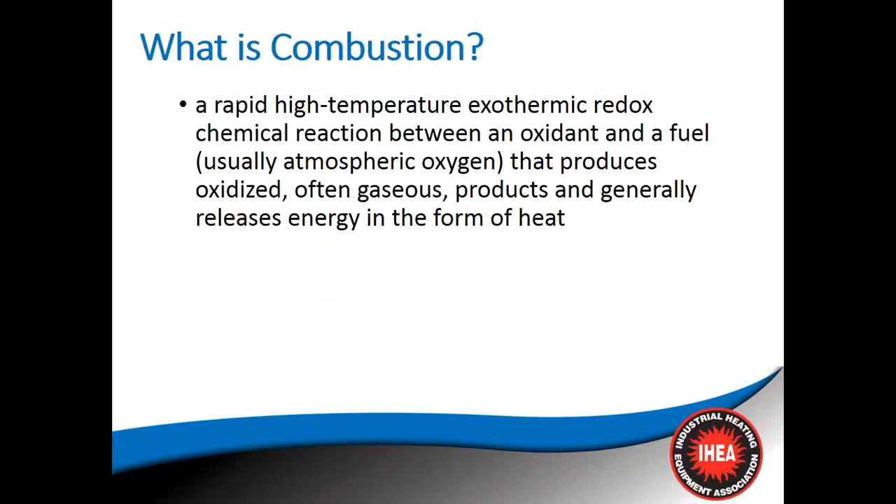In case you're having a little trouble remembering all of those words, or chemistry happened too long ago in high school, another way to think about it is fire.

Why study combustion? Well, there are three main reasons that I like to study combustion. One, it is useful. Two, it requires caution when using. And perhaps most importantly, it is fun.

There are many, many uses for combustion. The three I like to call it the three I's of combustion: increase temperature, incinerate, or illuminate. Throughout history, there have been countless processes that use combustion to do one or more of these three things: heat up, burn up, or light up.

Many, some counts would say most, processes in the industrially advanced world use combustion in some way or another. And in fact, combustion was one of the key elements that started the Industrial Revolution, when they figured out how to use the internal combustion engine.

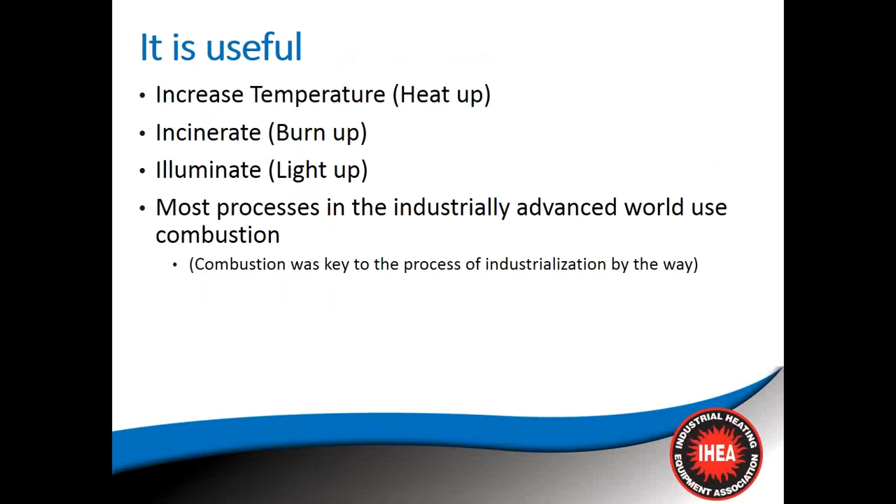It does require caution. I'm sure that many of you have seen this photo or others like it. On May 3rd, 1937, a blimp called the Hindenburg left Frankfurt, Germany with 97 people aboard. 3 days later, after an uneventful trip across the Atlantic Ocean, they were docking near Lakehurst, New Jersey, and the details are a little sketchy, but the result is apparent.

Right here, we have what we would consider uncontrolled combustion. 36 people died out of the 97 aboard. And what happened is they filled this blimp with hydrogen, which is lighter than air. We'll see later why hydrogen would have been a bad choice for that. But we have uncontrolled combustion.

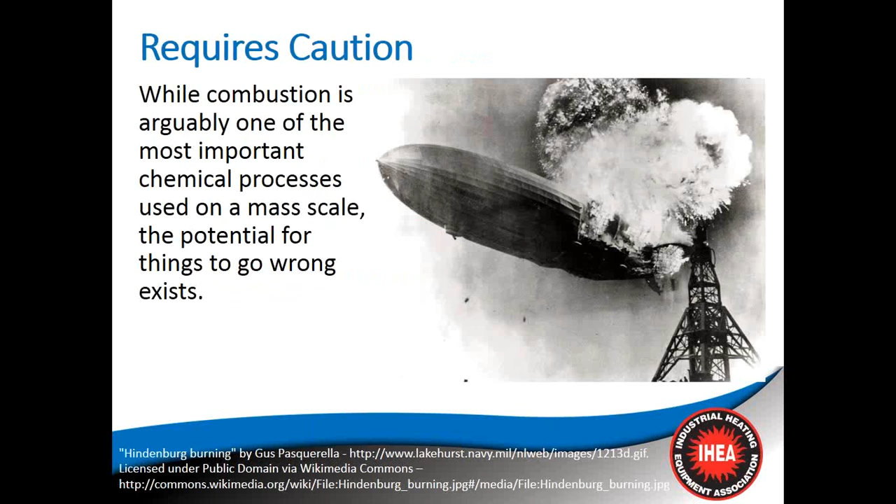Accidents can happen. We need to be careful. We need to respect combustion. We don't need to be scared of it, but we need to be respectful of it.

And it is fun. I was a little boy once, and as most little boys, I liked to see fire. I thought it was cool, and I never thought that in my professional life I would be able to do combustion, and that's what has kept me interested for the last 10 years or so. Hopefully I can infect you a little bit with my enthusiasm and show you that combustion is fun.

Before we get too much farther, I want to make sure that we have a common set of definitions so that we understand some of the terms that we're going to use.

A British thermal unit, also known as a BTU, is the amount of heat required to raise the temperature of 1 pound of water by 1 degree Fahrenheit. The calorie is the amount of heat required to raise the temperature of 1 kilogram of water by 1 degree Celsius. So these are units of heat or energy that we will use.

Particularly in this talk, I'll be using the British thermal unit, but you may run across the calorie or some other similar unit. The specific heat is the amount of heat required to raise a temperature of 1 pound of a substance 1 degree Fahrenheit, or 1 kilogram of a substance 1 degree Celsius.

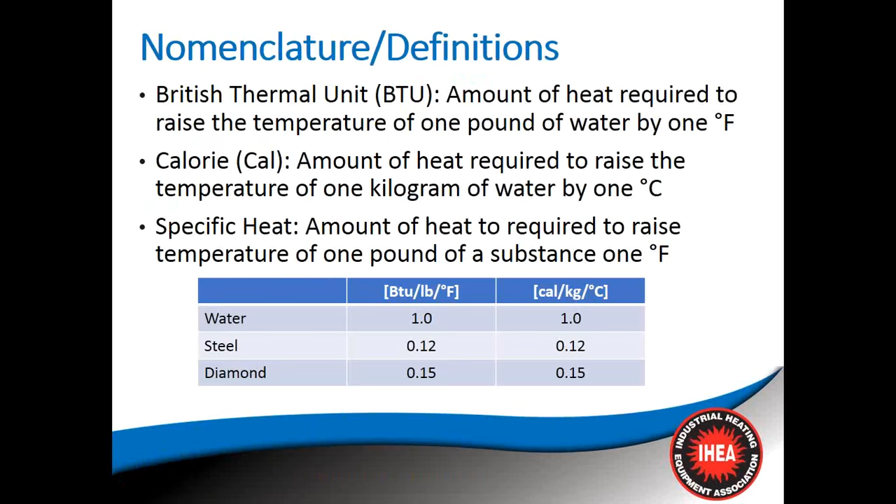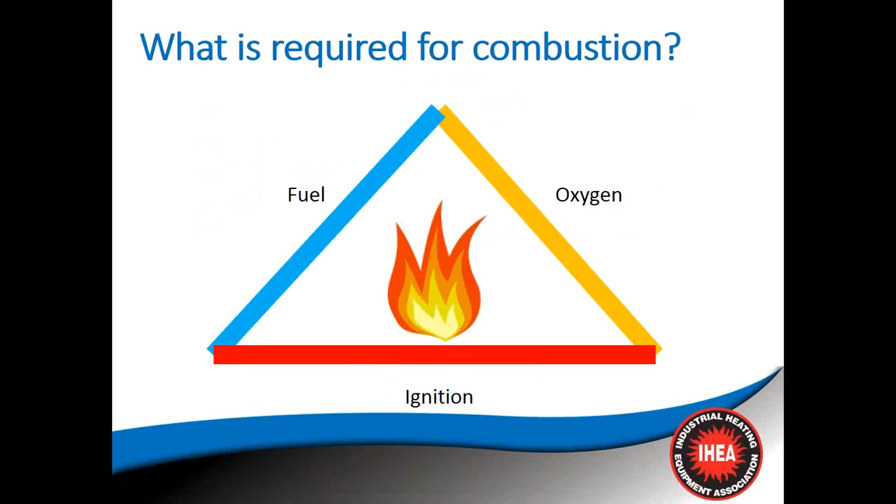What is required for combustion? There are 3 things that conveniently form a triangle: fuel, oxygen, and some source of ignition. Get those together and you can have combustion.

For fuels, most often we'll see those as a hydrocarbon, which is a substance that's made of hydrogen atoms and carbon atoms that join together into molecules that will combust later.

Many times, and particularly in industrial applications, but also in residential applications, your furnace, which if the weather has been anything like it is in Pittsburgh where I live, you have been using your furnace quite a bit over the last few days.

But the fuel there is often in a gaseous form, such as methane or propane, or there can be process gases such as coke oven gas or blast furnace gas. Many different forms of fuel. All of those that I've just mentioned have one thing in common: they're made of hydrogens and carbons mixed in various specific combinations.

There are other forms, such as a liquid, say an oil or gasoline for your automobile, and solids such as wood or coal. The important thing is, though, that in order for these substances in either liquid or solid form to combust, they actually have to become gaseous in some form. So when your coal is burning, not to get into too many details, but the hydrocarbons form a small gas as they heat up, and then they combust.

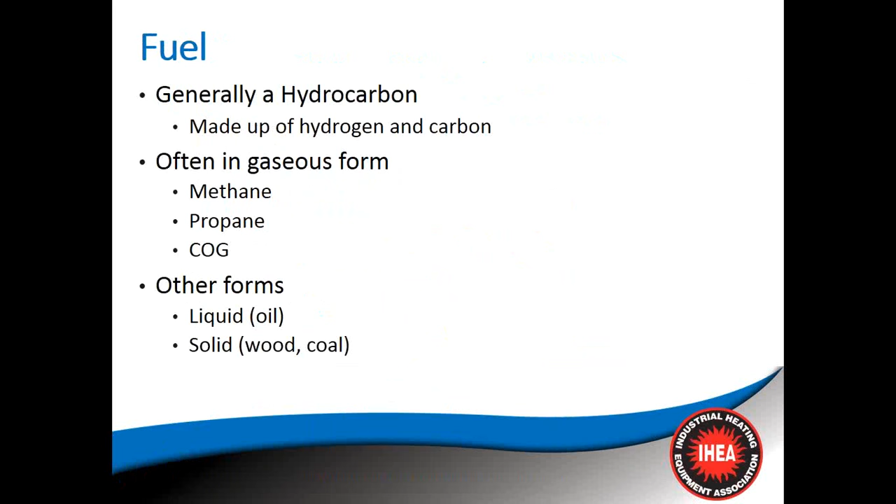Oh, I meant to mention that just like with the Hindenburg we saw, that source of fuel is not technically a hydrocarbon. It was pure hydrogen. So not all fuels are hydrocarbons, but the vast majority of fuels used commercially or industrially are going to be a hydrocarbon.

Oxygen, which is the second leg of the combustion triangle, is available in atmospheric air. Look around you in your room there. Look around and look at the air. I'll give you a second to do that. If you had superpower vision, you would see that approximately 21% of that air is oxygen and about 79% is nitrogen.

Atmospheric air is readily available. However, if you're going to use it to propel a combustion system, then you'll need a fan or a blower. There are some systems where you can use a pressure difference to drive that combustion, but generally it's going to be a fan, a blower, or something like that.

It is also possible to use pure oxygen. The problem is that is not readily available. It has to be purified, separated out from the nitrogen, and that is a utility expense. That can be piped in or crated in or something like that, bottles of oxygen. It is more efficient, but it is also an ongoing expense, whereas air is readily available, and there is an expense associated with the fan or the blower, the electrical cost of that, but the air itself does not require any utility expense.

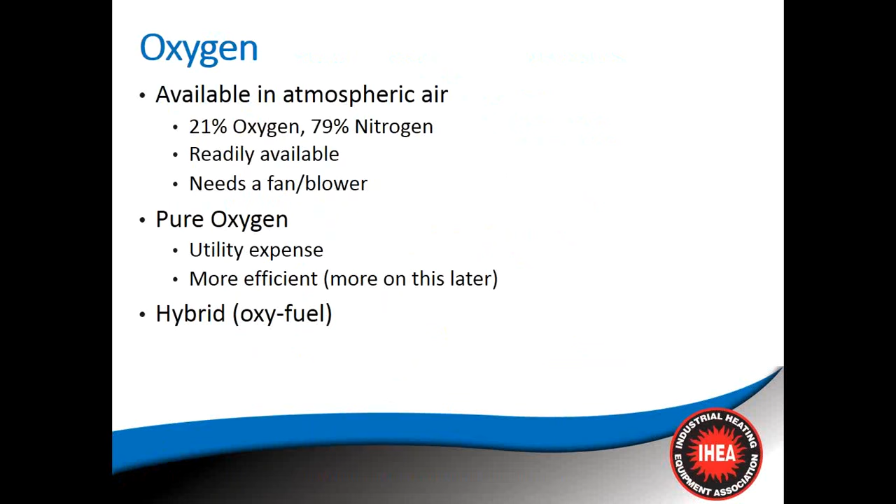The source of ignition, which is the third leg on the triangle, there are several different types. Say a direct spark ignition, such as your spark plugs in your automobile. You could have a small pilot, like I have on my water heater at home, or you could simply use the temperature in the chamber. If you have a process, say a reheat furnace or something like that, where the temperature might get very high, anything above 1400 or 1600, then often you can introduce the air and the gas into that chamber, and it'll be hot enough that it will ignite and combust on its own.

There are subsets of these. For example, I was thinking about it when you watch the survival shows and you rub two sticks together. That is a very difficult way to do it, but what you're doing is you're raising the temperature of those two sticks. You're getting enough heat there that you can actually combust the materials. So that would be an example of a temperature ignition. And if you have flint and steel, that's obviously a direct spark ignition.

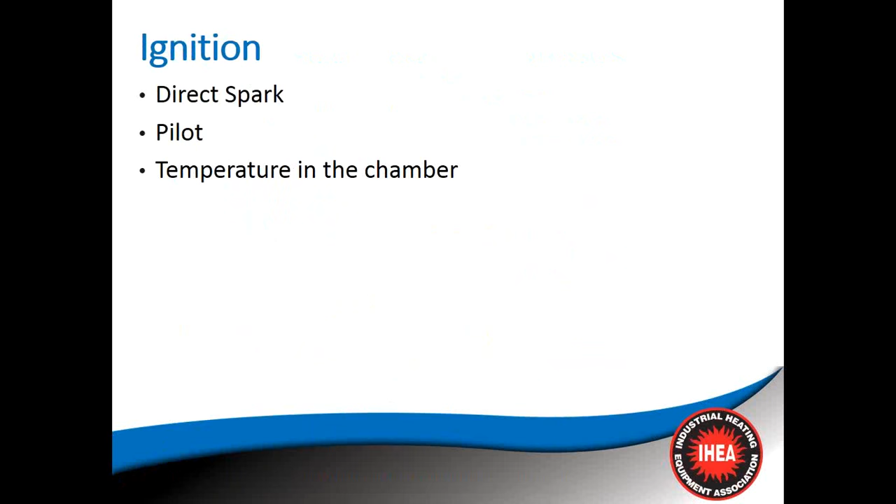So we need to keep them in a certain range of fuel and oxygen amounts, and I will go at great length over the next few minutes to discuss what those ranges are and how we calculate what those proportions are.

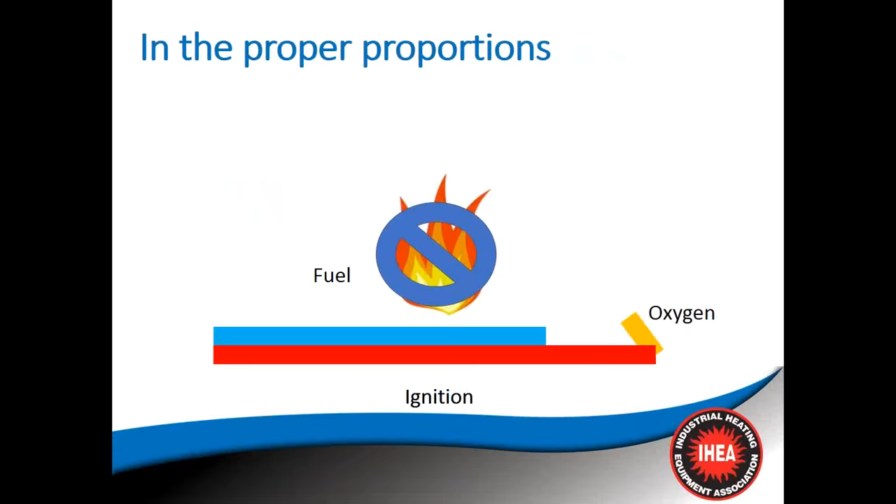The proper proportion is known as the stoichiometric ratio, which means the proper amount of oxygen or air required to combust the fuel completely, with no oxygen and no fuel remaining after the reaction.

So at your next cocktail party, you can impress your friends and colleagues by knowing this hundred dollar word here, stoichiometric ratio. Or maybe you need to go to different cocktail parties if this is the kind of topic that comes up. But in any case, what this means is that you have the right amount. It's like the middle school dance. You want to make sure that everyone is able to pair off and no one's lingering around the periphery, unable to enjoy, unable to take part.

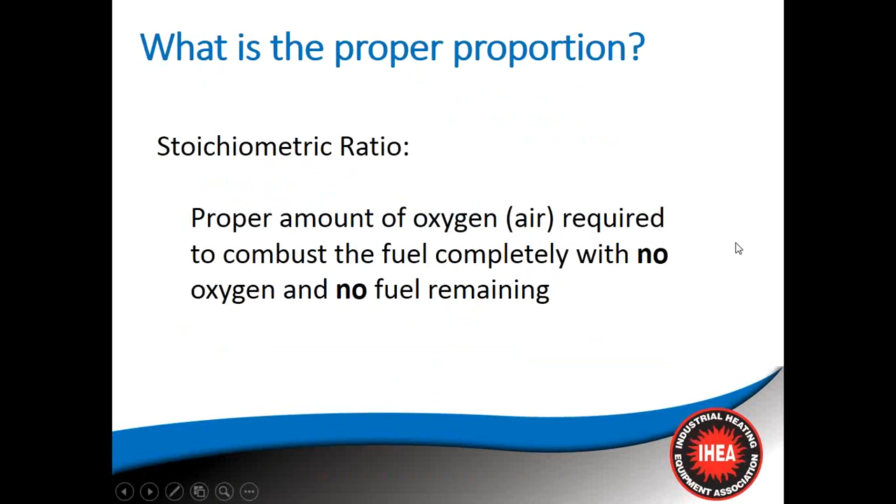As an example, a common fuel is natural gas, and that is predominantly, it's almost entirely made out of methane, which is one carbon with 4 hydrogens, CH4.

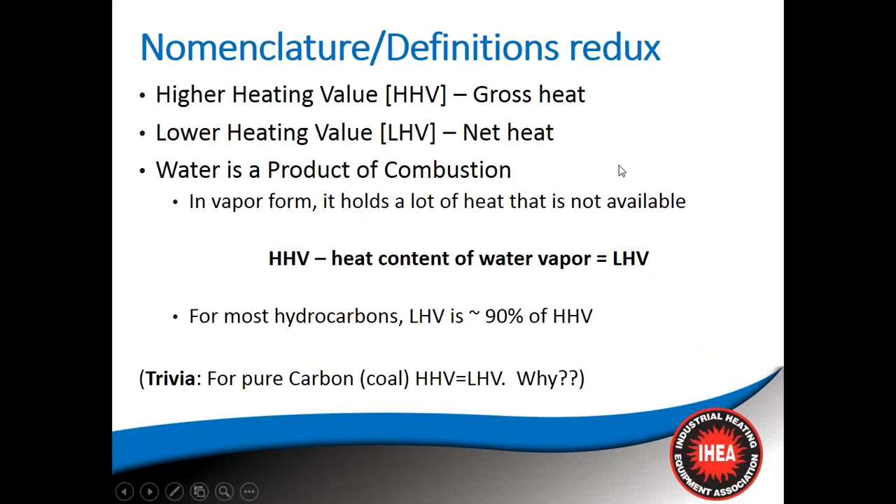10 parts of air to get this proper proportion. This number is dependent on the fuel. For methane, for natural gas, it's 10. For other fuels, that will be different, and it's specific to each fuel. And we report that as a ratio, so many parts of air for one part of fuel.

Sometimes engineers get creative and come up with words like stoichiometric. Sometimes we are not creative and come up with terms like air to fuel ratio. So we call this the air to fuel ratio, and that again is

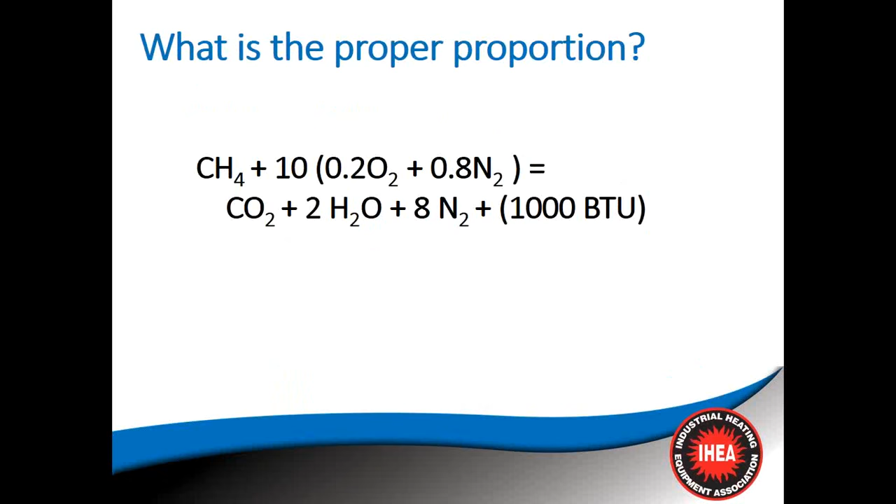Let me come back here. This might be the cleanest place to talk about this, where we see the nitrogen right here, and we might be able to get a little clarity on the question here. And I appreciate the involvement, Jeff. I hope you don't feel put on the spot. You should win a little prize for having the first question here.

I don't see that there's anything else at the moment. Oh, okay, here we go. Great. Using nitrogen in a combustion furnace is cheaper to run using nitrogen instead of pure oxygen.

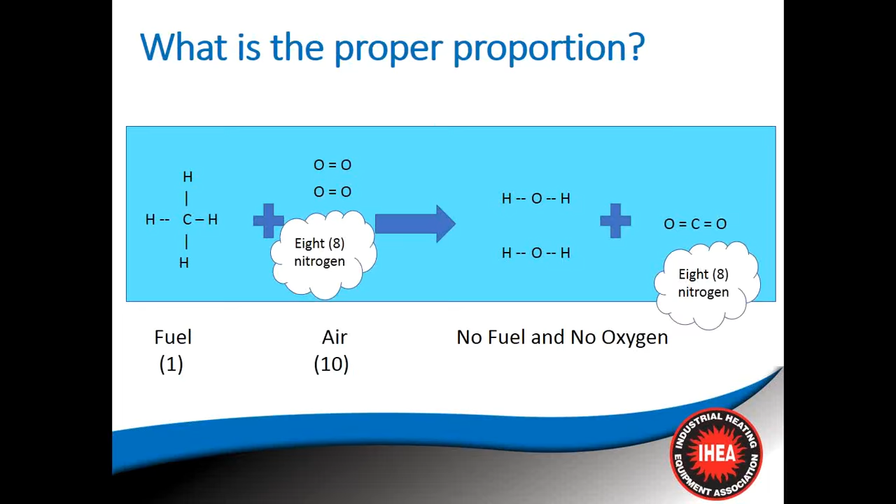Well, yes, the point I was making earlier is that in many cases, because the nitrogen just comes along, it's mixed up with the oxygen in the air. So the air around you is readily available. No one charges us to use the air. So yes, there is no utility expense to using air, aside from whatever electricity you might need to use in the fan. With oxygen, in almost all cases, that's something that you would actually have to buy. It's a utility, such as your water or your fuel or electricity. There's a delivery charge, there would be a bill for oxygen. There are cases when it makes sense to use oxygen, there are cases when it makes sense to use air, and either of them will get you combustion, will get you heat, either the heat up, burn up, or light up that you might need. So the point I was making is that the nitrogen and oxygen that comes in air, you're not actually paying for it. Our government at this point has not found a way to charge us for breathing air, so we can use that freely as long as we have some way to deliver it to our combustion system.

And I hope I was headed the right direction, Jeff. If you'd like a little more clarification, I'd be happy to provide that. Or anyone else out there? Looks like that does it. Thank you, okay Michael, yes, and thank you. Please bring the questions along. That way I don't get sort of caught up in my own mind here.

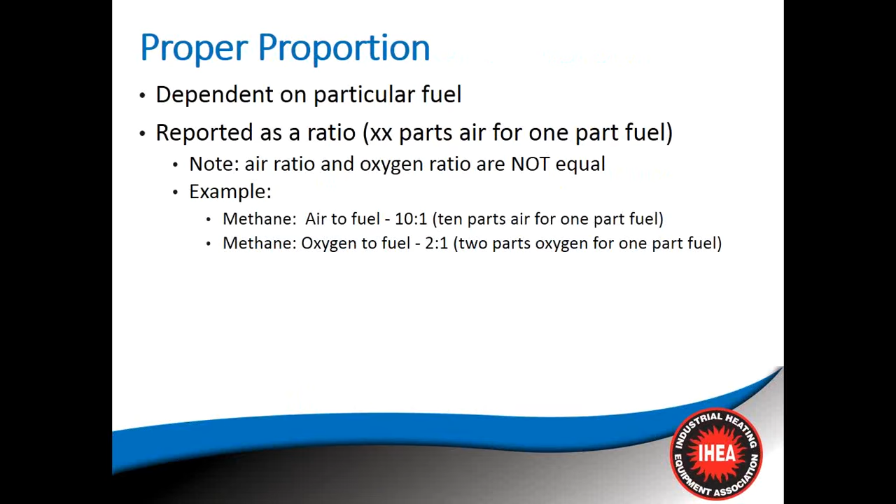So the proper proportion, air to fuel ratio, 10 parts air to 1 part of fuel. Well, what do I really mean by that? In real life, it is very, very difficult to grab exactly one little molecule of oxygen and one little molecule of methane, make sure they get together and introduce a spark and make sure combustion happens. Molecules are so absolutely tiny that we can't see them, so we have to put a bunch of them together, one part.

So what makes it even more difficult is that the density of gases, and remember both of these are gases, the fuel, methane, and the air, are both gases. So that means they change with temperature and with pressure.

So what we have to do in order to get one common mass of oxygen or a mass of fuel, we have to define a pressure and a temperature. The details are a little esoteric, and I'd be happy to cover that in the 201 level combustion course. But what's important to remember is that the parts are based on a standard or normal condition. Some governing body has decided that at 60 degrees Fahrenheit and 14.696 psi, when you have a gas, that's the standard. We're talking about standard cubic feet. So a cubic foot, a 1 by 1 by 1 box at 60 degrees, 14.696 pounds of pressure—whatever is in there, if that's air, then that's 1 standard cubic foot of air.

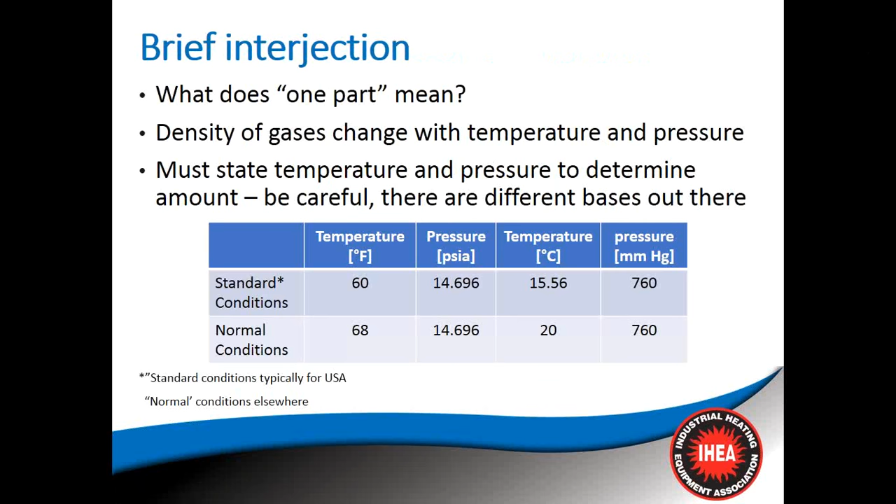And you need 10 of those to go with 1 standard cubic foot, a 1 by 1 by 1 box of methane. If you put those together, you can have stoichiometric or complete perfect combustion. Again, the details are a bit advanced. The point is, there are standards by which you need to calculate the amount to get 1 part. A brief note: standard conditions in the US is generally the term used. Elsewhere, they call it normal conditions. I don't know if that means the United States is not normal—I won't speculate on that. But anyway, there are different standards, and it's important to be aware of which standard you're using.

So, proper proportion: 10-to-1 for natural gas, or methane—that's the theoretical stoichiometric. You'll recall I mentioned that the percent of oxygen is actually 21% instead of 20, and I swept it under the rug and said we'll just use 20. But the actual stoichiometric is 9.55 to 1. For calculations, we usually use 10 to 1, and for a normal operating ratio, we use 11 to 1.

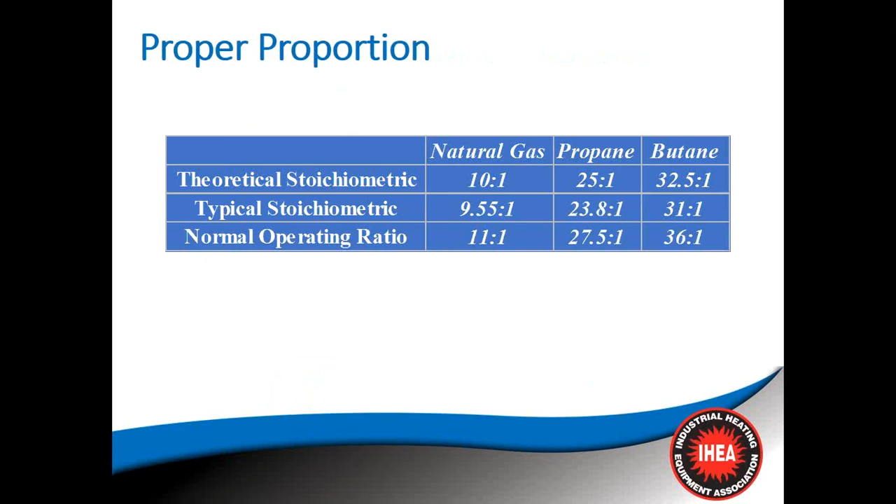Everyone at this moment should have the following question: why use a higher operating ratio? And just to point out, other fuels have their specific ratios. Propane's theoretical ratio is approximately 25 to 1; the actual is 23.8 to 1, and so on for butane. These other fuels have a set air to fuel ratio—I didn't write it here, but this is the air to fuel ratio. The oxygen to fuel ratio would obviously be different.

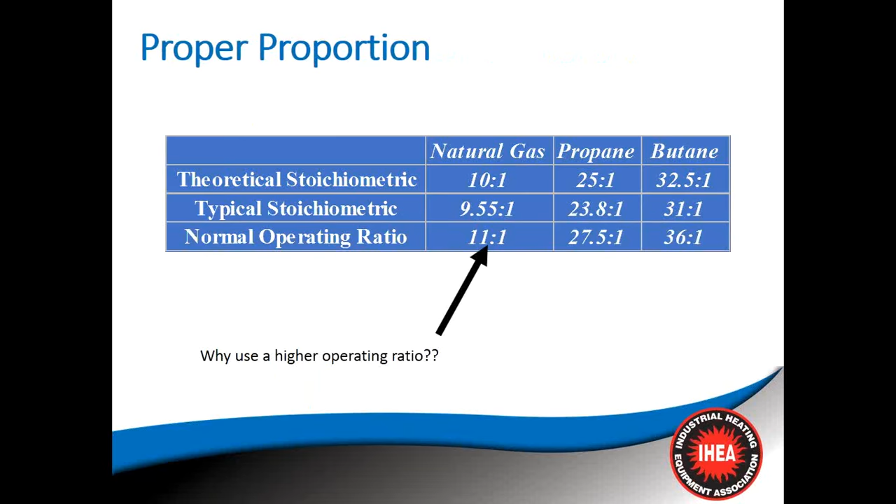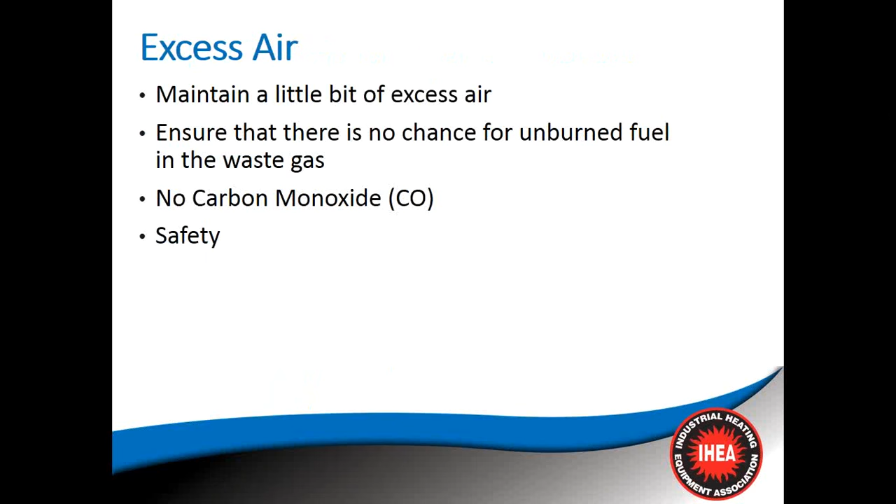So why use this higher operating ratio? If we have a little bit of excess air, that ensures there's no unburned fuel in the waste gas—no carbon monoxide, and you'll see in a few slides where carbon monoxide can come in. That's an issue of safety. So as good as we combustion engineers might be, if we put exactly 9.55 parts of air in with 1 part of methane, there's a chance they might not get mixed together quite right, and there could be a pocket of unburned fuel that passes through the chamber and enters the exhaust gas system. Most of us would agree that having live fuel in your exhaust gas system is not something we'd prefer. So we put in a little bit of excess air to make sure we get everything burned up and don't have any unburned fuel go out our system.

Hey Michael, you like excess air—why stop at 10%? Is 20 better? Let's go to 30. Where does the madness end?

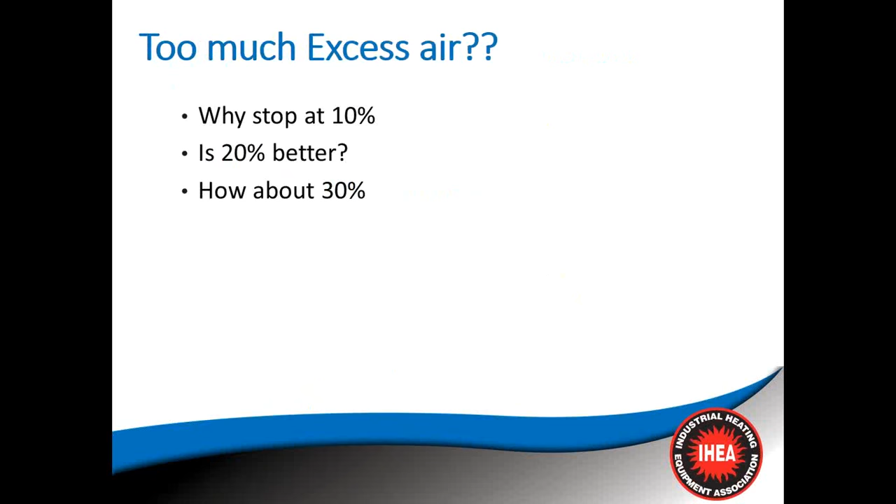Well, what happens is that when you have excess air, remember that nitrogen goes along and does nothing except absorb heat, so you have to heat that up as well. Excess air gives you excess nitrogen, and that nitrogen absorbs heat, making less available for the process—more nitrogen sucks up more heat.

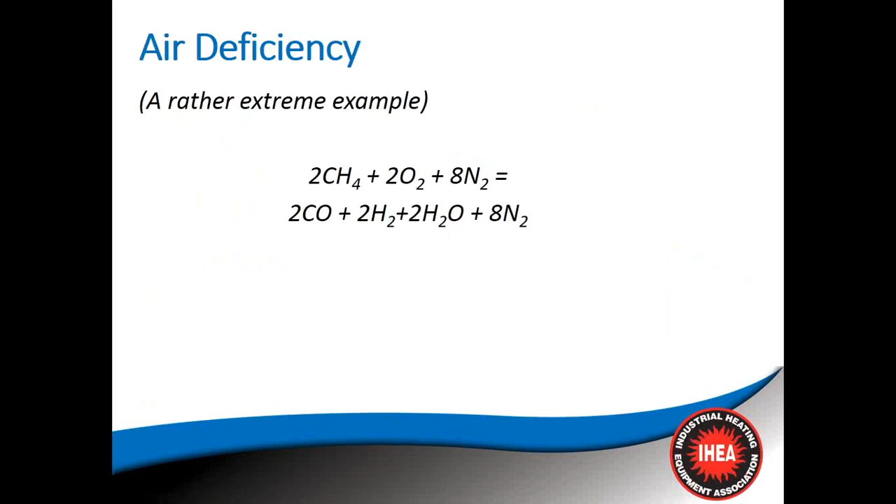But what are these odd things that we aren't used to seeing? 2 carbon monoxides and 2 hydrogen molecules. Those are actually molecules of unburned fuel. And one thing to note is that carbon monoxide is a deadly poison. Even in tiny, tiny amounts, it can cause headaches, dizziness, illness, and even brief exposure to high concentrations can have very bad long-term effects.

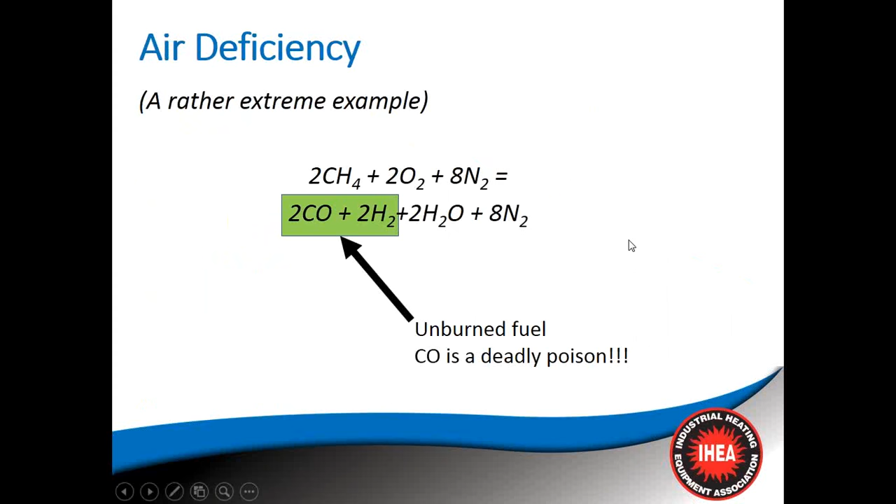So we want to avoid having carbon monoxide. It's not safe. But the reason this forms is we don't have enough oxygen molecules to pair up with the carbons to make carbon dioxide and to make water, H2O. There just aren't enough oxygens.

That is unsafe. You're sending unsafe material both to people who might be exposed to the carbon monoxide, but also to the waste gas system. If you think about it, you're sending waste gas up your chimney, or flue, waste gas stack, and eventually, when it gets to the outside world, it will come in contact with oxygen.

If things are really off the rails, what could happen is when the unburned fuel meets up with a source of oxygen, if it's hot enough or some other source of ignition exists, you could get combustion inside your waste gas system. Again, I don't think many people would like that. You're also paying for BTUs, energy that you don't use, that you're literally sending up the stack and heating the air above your plant.

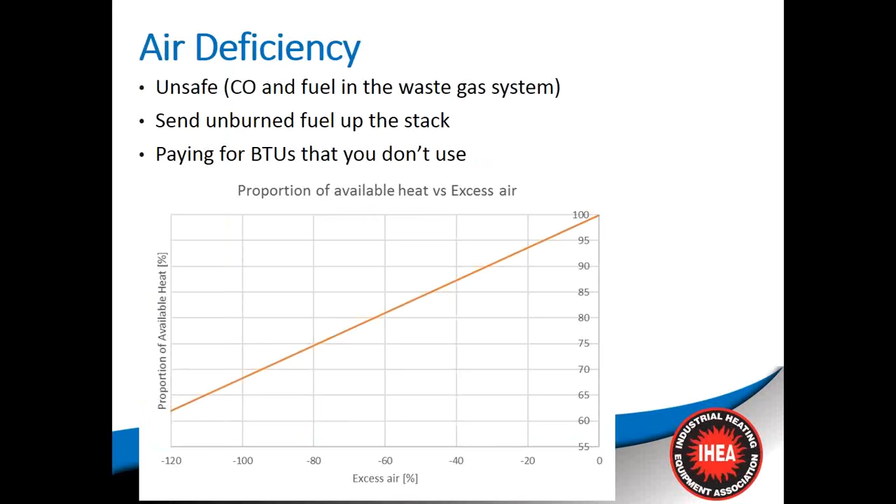Your best practice, with a caveat to come in a minute, is always to maintain a slight amount of excess air. You want to avoid an air deficiency. You don't want to be fuel rich. But remember that excess air leads to inefficiencies and can lead to process complications. If you're leaking too much air, you might actually overwhelm your waste gas system, overwhelm the stack.

Now, the important caveat is that there are some processes that require something different than slight excess air, such as a galvanizing furnace, where you will want to run a little bit air deficient. For a titanium forging furnace, you want to run with a lot of excess air, sometimes up to 30, 40% or more. Those are specific process requirements. If you do not have those requirements, and you're simply trying to get heat into a box, the best practice is to have slight amounts of excess air and always avoid air deficiency or running fuel rich.

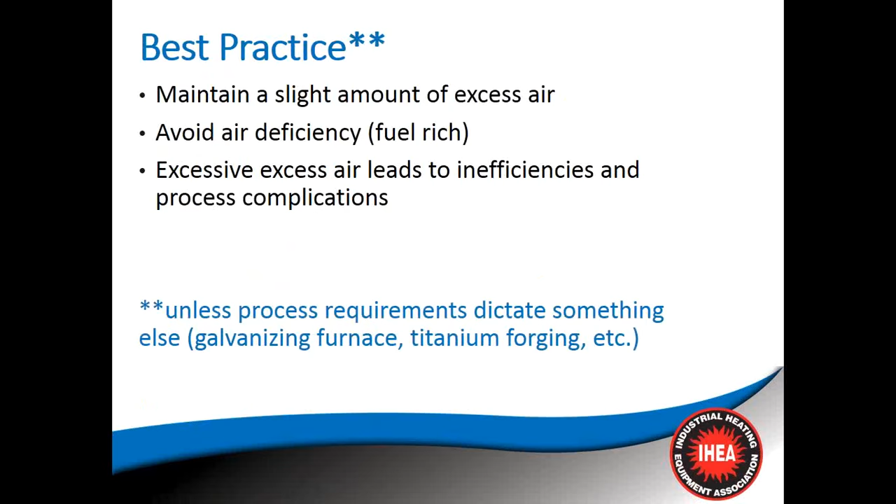Finally, on the right proportion question, there are certain limits before that combustion triangle falls apart. These are the lower and upper flammability limits, LFL and UFL, also known as the explosive limits. These are particular to a fuel, often expressed as a percent fuel by total volume. The important thing to remember is that mixtures within these limits can combust. So if you have methane, any amount between 5% and 15%, combustion is possible.

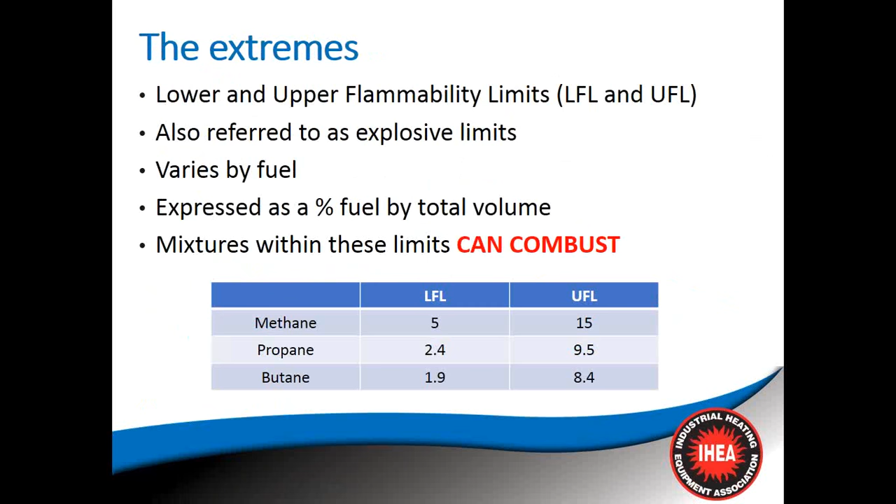Now remember, there is only one point at which you have ideal stoichiometric combustion, but you can have some excess air, some excess fuel, and you will still combust. And these ranges are specific, as I said, to each fuel.

All right, since no one wants to ask questions, I will ask a question. How much air is required to combust 10 MMBTU, which is million BTU?

All right, and is this a trick question? I didn't tell you what the fuel was. What if I'm talking about methane? What if I'm talking about butane?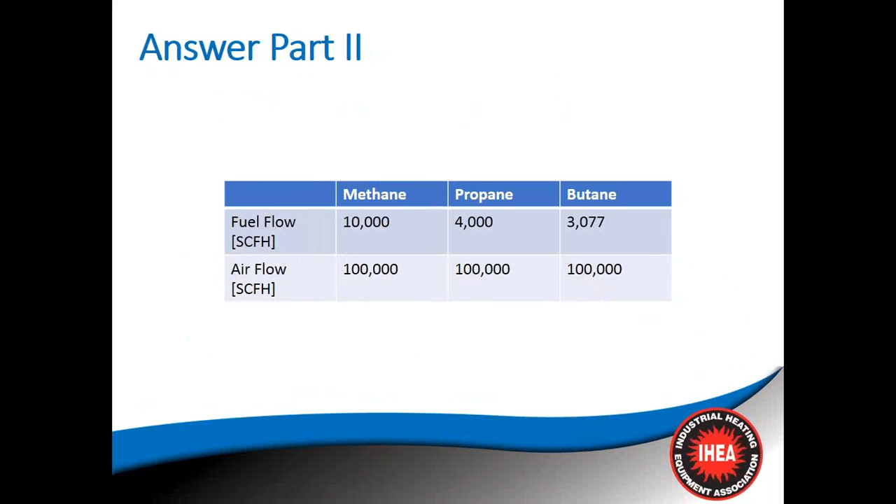That's because the stoichiometric ratio and the heating value are such that you need the same amount of air to get a set amount of heat. One cubic foot of air, basically independent of the fuel, as long as you have a standard type of hydrocarbon, will be roughly 100 BTU of heat. Now this can change if you have some exotic mix, an off gas, blast furnace gas—this doesn't quite work out as well—but for a standard hydrocarbon, you're going to need approximately one cubic foot of air to get 100 BTU of heat. It's a neat little rule of thumb.

Michael, I do have another couple questions here that have come in. Hey, go for it. This one's a little lengthy, but I will let you know what they're asking.

In my studies with several furnaces, I have noticed that using high reflective coating will allow close to stoichiometric combustion without CO. My conclusion is that reflected radiation increases the residence time during which full combustion to CO2 is possible. What is your experience in using either high emissivity or high reflective coatings for enhancing combustion?

I always love when people start putting what they're hearing into their real life application, so I appreciate you thinking about this. Let me make sure that I understand the comment here. So what I think I'm hearing is that on a furnace with a high reflective coating, for example on the refractory, the operator is able to keep closer to a stoichiometric ratio without the danger of running into incomplete combustion.

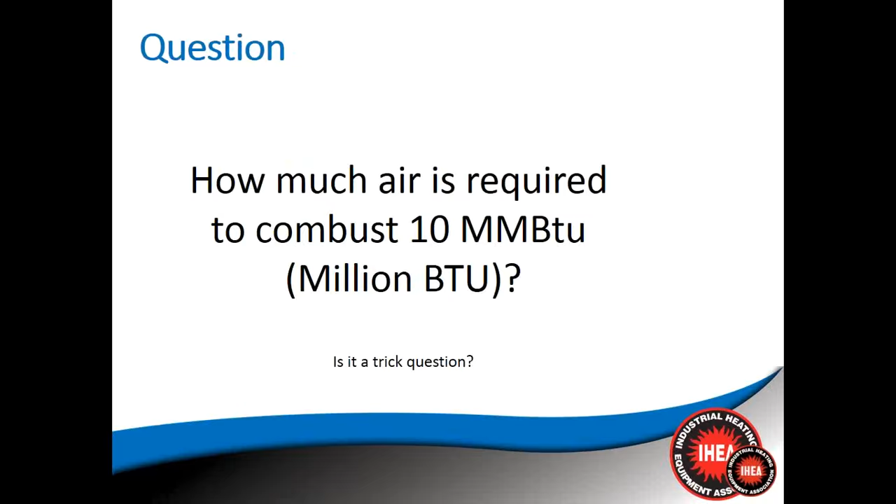And when he was talking about the specific fuel number, that's how much fuel it takes to heat up a unit of whatever it is you're producing. So as you run closer to stoichiometric, you will be able to have more heat available. So I absolutely would expect to see those kinds of numbers if you're making those adjustments—I would expect to see those kinds of savings. The 7% is maybe a little higher than I would have expected.

If you're dropping from 1.7 down to 0.7, you must be doing a lot of things really, really right to get those kinds of numbers. But it's definitely not outside the realm of possibility, as you can attest. You must have a good combustion system that you can run that close to stoichiometric without running into any issues with unburned fuel. It sounds like your control system is in good shape, that everything's tuned up properly, and that number is believable—on the good end of believable. So I like the work that you're doing there.

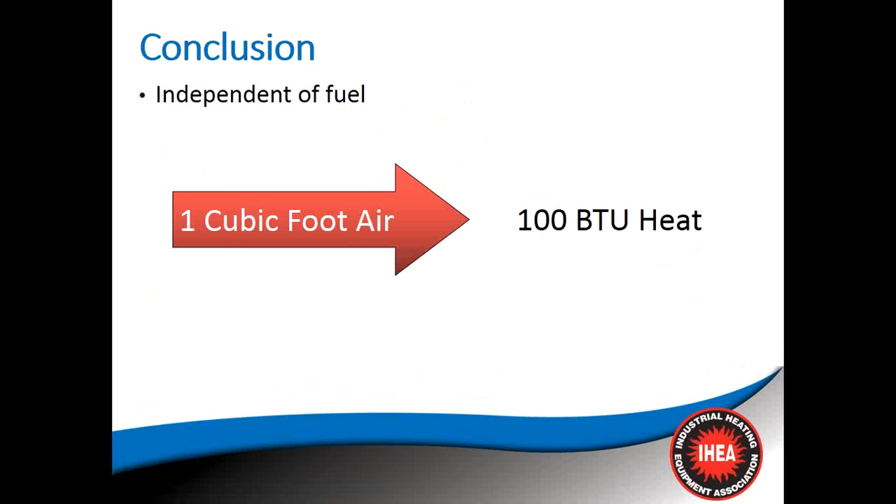I'll move along to a summary. Thank you for the questions, I really appreciate this. In summary, combustion uses - you can heat up, burn up, or light up. Many industrial, commercial, and even residential applications use combustion in some way. Three things required: oxygen, fuel, and a source of ignition, and as I've said many times, in the proper proportion.

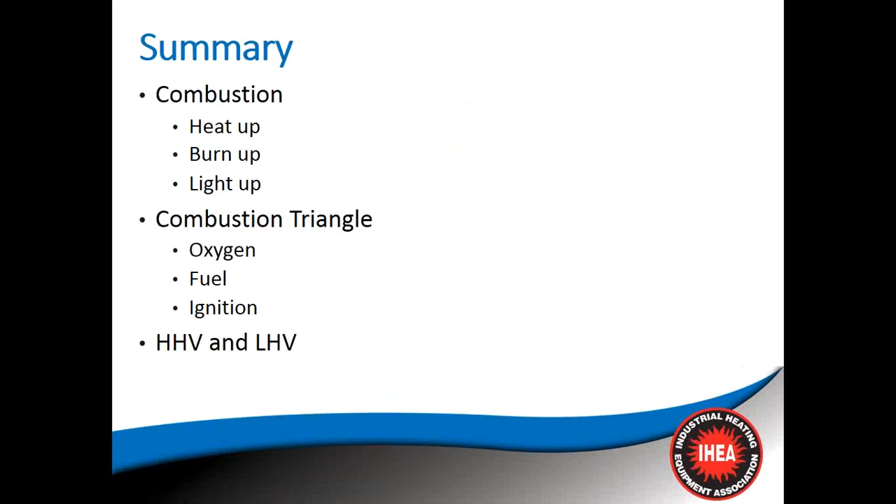There's a distinction between higher heating and lower heating values, which is important and a bit complicated, but it's important to use the right definition. The stoichiometric ratio is fuel dependent, and since not many of us can run on a perfect stoichiometric ratio, it takes a darn good control system to do that. You often run with a little excess air, which is safer, but you lose a little efficiency because the extra waste gas, particularly nitrogen, carries off heat.

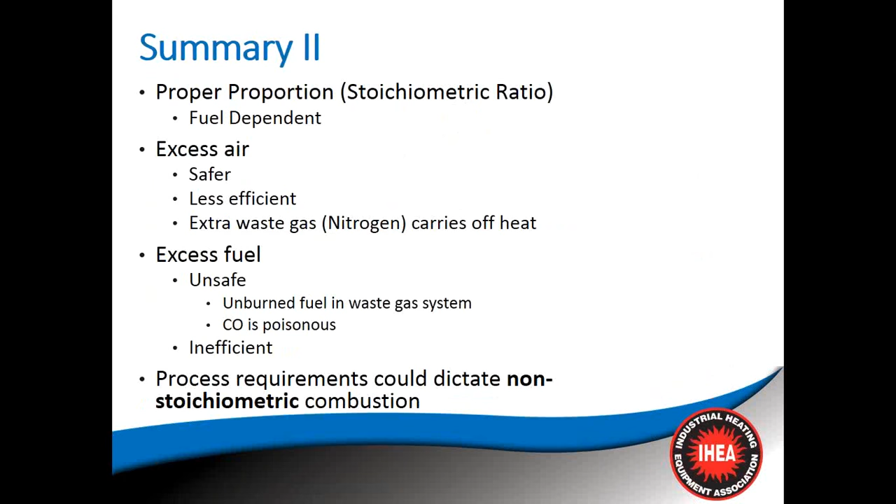If you run excess fuel, that is unsafe - you're sending unburned fuel into the waste gas system. Carbon monoxide is always a potential danger and very bad for anyone who comes in contact with it. There are inefficiencies related to that too, since you're not actually burning all the fuel. Some processes require non-stoichiometric combustion, and if your process requires that, I'll let you do it. But otherwise, I want you to run with a tiny bit of excess air.

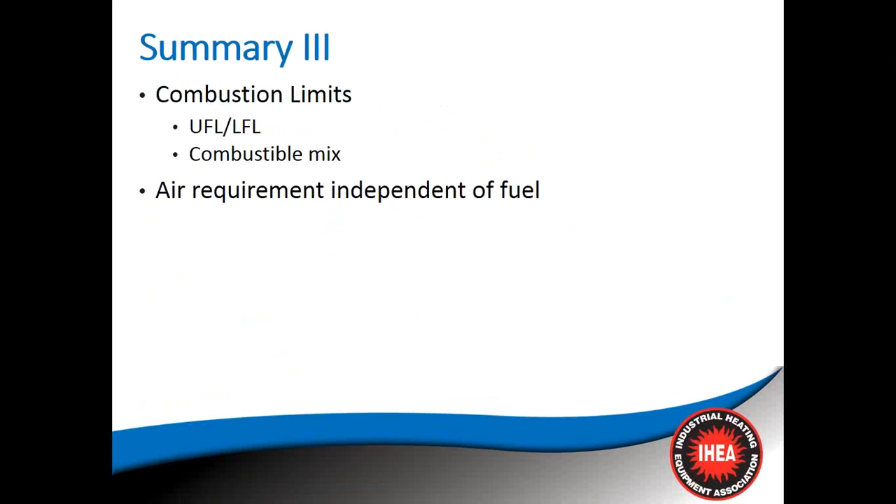There are combustion limits. Remember that stoichiometric is one point, but you can have a combustible mix if you move to either side of that, which can be a safety concern if your mix falls inside that sometimes rather broad range - you could still combust. And finally, the air requirement is independent of the fuel.

I appreciate you guys romping through the world of combustion with me for about an hour here. I thank Kelly and Brian for all the work they put into helping get this together. As Kelly said, if you have questions, she will send them to me, and I'm happy to get back to you and expand on any of these topics. Early on I said it was fun, and I don't know how weird that makes me, but I think it is - I enjoy exploring some of these questions and topics. So please be in touch.

All right, I guess I'm probably weird too, because I like this stuff too.